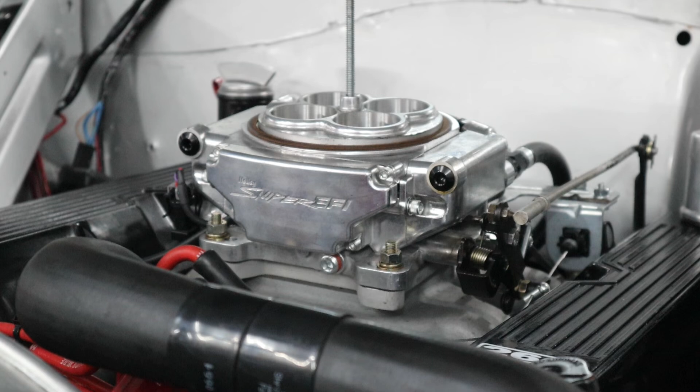Okay, so there's our Sniper unit, and there's a couple things that I want to give you guys some part numbers. So the part number 20-16 is the Sniper EFI throttle lever extension. That's what it looks like. It bolts on to the throttle linkage and gives you a better fulcrum for making the throttle easier to pull, especially when you have a cable system or anything like that.

And then if you look in the back corner, you'll see the TV cable bracket. That is a 1953 part number, and that's a throttle and kick down lever bracket. So you can buy those parts from Holley. It makes your installation a lot easier.

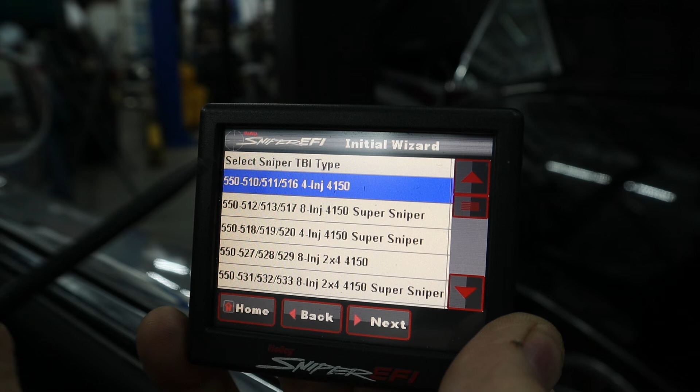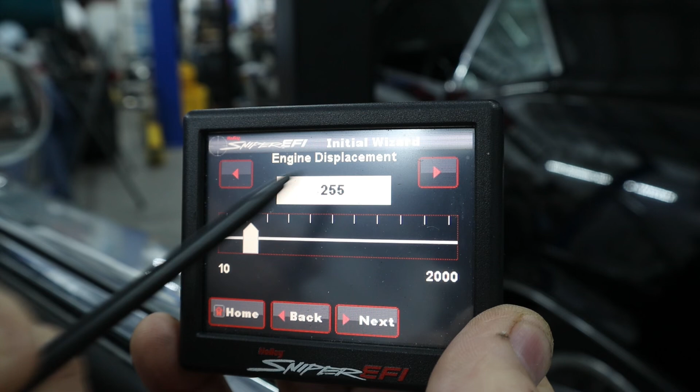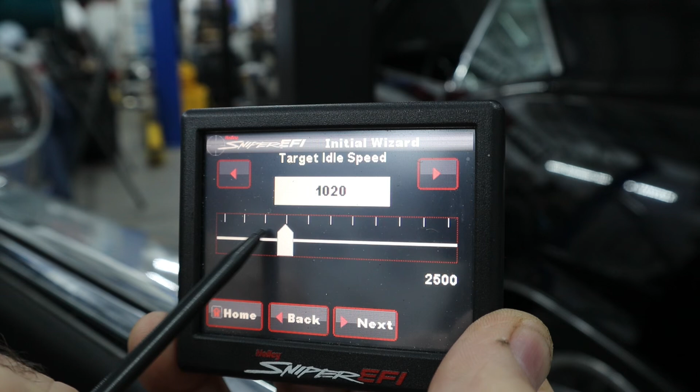Okay, so once you have the system installed, you get your 3.5-inch screen and you power up the key and it turns the system on. So from your home screen, you want to click Wizard, pick your system by your part number, number of cylinders, engine displacement. Now this motor is a 255. Your idle speed. The idle speed doesn't have to be perfect, just something in the ballpark.

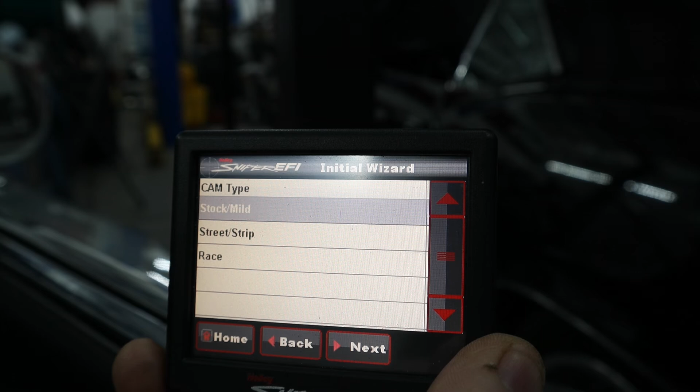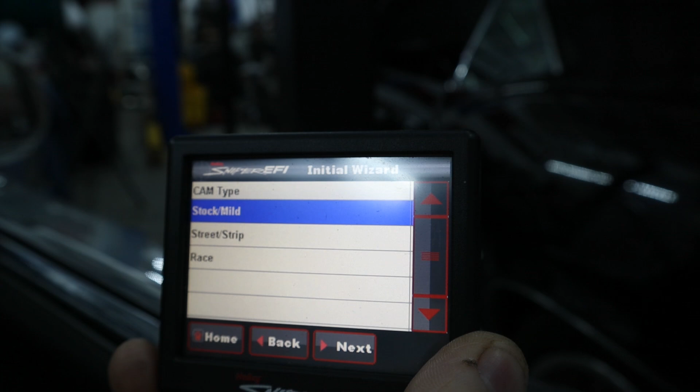Then you want to tell it what cam type. Now I have found that these tunes will overfuel the engine for initial startup, so I would definitely use stock or mild if it's a slight cammed engine. Street strip would be for something that is probably over 500 lift, and race obviously is for race. We're not going to have any power adders on this vehicle.

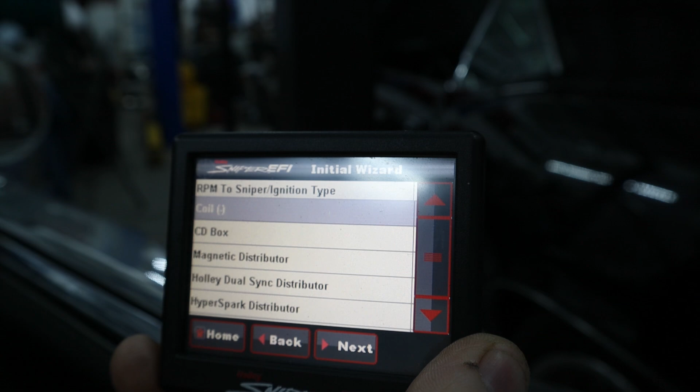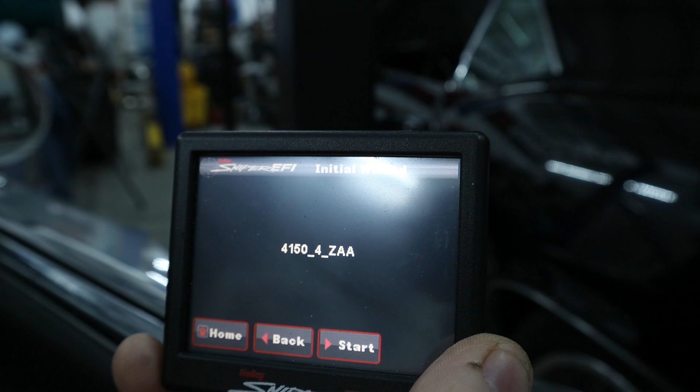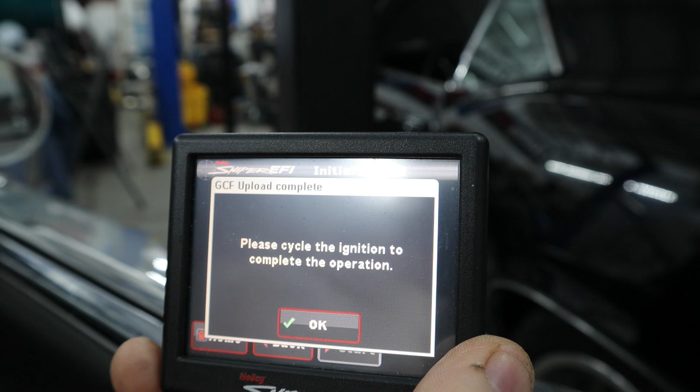And then you pick your ignition type. So in this vehicle we're using fuel only, so we use coil negative. But if you're using a CD box or a dual sync or a HyperSpark, you would select those. So now the handheld has picked a file, and we're going to send it to the ECU. You can hear the fuel pump turn on, turn off, and you have to cycle the key to make this permanent.

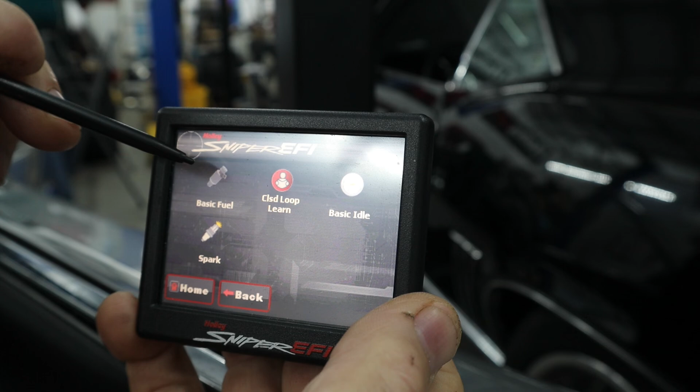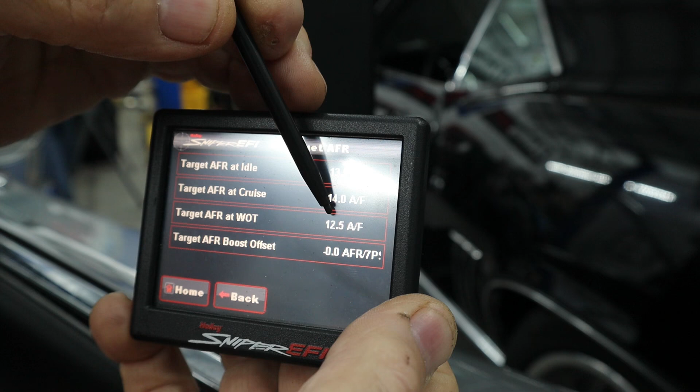Now the handheld reboots, and we're all set. Now you can hear the fuel pump turn off. Now you can go into your different pages for tuning. You got your basic fuel, target AFR. With the handheld, you get AFR at idle, AFR at cruise, AFR at WOT. You get power enrichment and fuel prime, basic things. You can go through and do all these different things. You can connect some outputs.

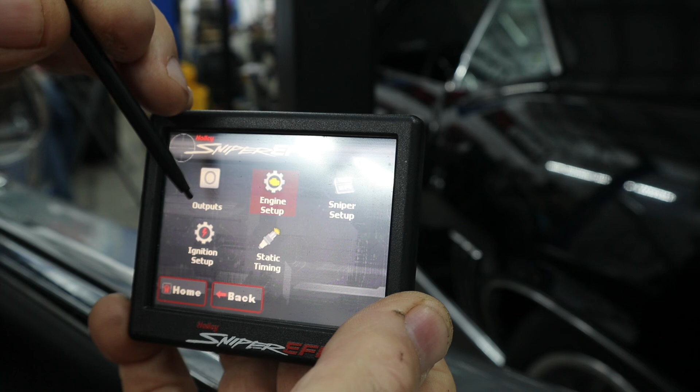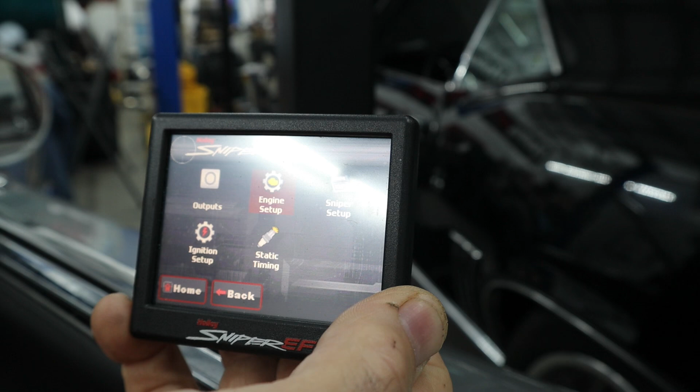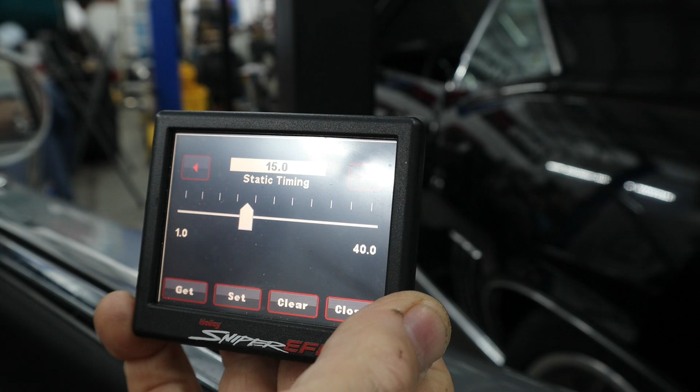So now that you have a base tune in there, what you want to do is start the engine. And if you're using any type of ignition timing control device, like a Holley dual sync, a crank trigger, or HyperSpark, you go to static timing, pick a number, make it an even number. So let's go 15. And then you put set, and now the ignition timing is locked at 15 degrees.

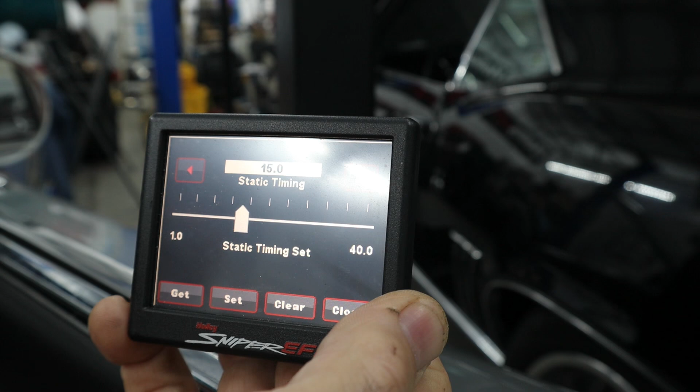You would put a timing light on the engine and adjust your distributor till the timing on the harmonic balancer matches the timing that you've selected for static. Once you're done, you click clear and you close it. Now whatever timing is on this map here will be the timing it's actually in the engine, 1 for 1. So you'll never have to move the distributor after that.

And then you have your monitors. You can go in here and you can see all your sensors: MAP, coolant, TPS, ignition timing, which is NA in this particular application, IAC position, battery voltage, manifold air temp. You can go to vitals. You can see when your fans are going to turn on and off, AC shut off, and whether it's in open loop or closed loop. These will turn green when they're active.

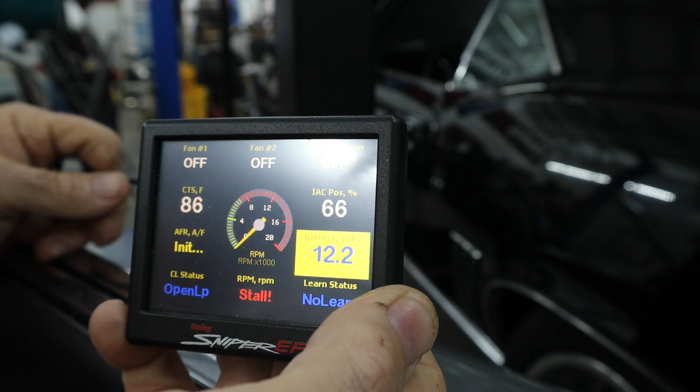Notice the RPM, it says stall. That means the ECU does not see an ignition input. When you crank the engine over, it should go to syncing, and then it'll start showing an RPM. That is the computer seeing a crank signal, identifying it, accepting it, and once it accepts it, it turns the injectors on and you'll receive an RPM and the vehicle will start and run.

Very important: if this box turns off while you're cranking the engine, that means the ignition power source that you have going to the ECU is not staying powered up during cranking. It could be a slight power drop, but it needs to maintain at least 10 volts to keep everything on.

So if this doesn't work, then you need to check your wiring. On old cars that didn't have an ignition signal while cranking, the signal would come from the starter. What I would do is I use a relay and I power it up through the ignition switch, and then I use a jumper from the start switch with a diode.

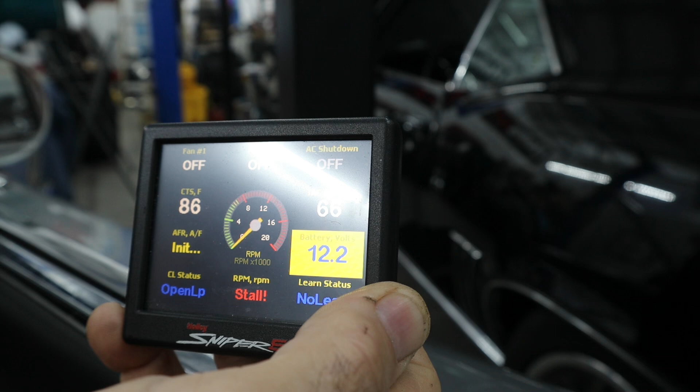So when it's in start, it's getting power from the start circuit of the ignition switch, and then when you let go of the key to ignition, the diode stops the voltage from going back and making the starter stay engaged. But that's a quick, easy way of doing it, and then the handheld will always stay on while you're cranking it, and the engine will run and start no problem.

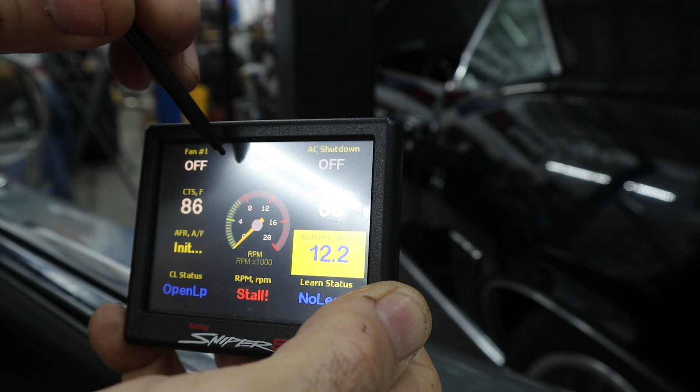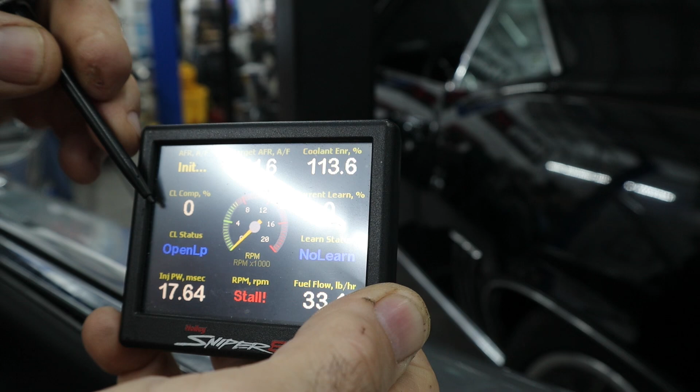And you got air-fuel ratio. Now this is going to show what the engine is actually seeing, or what the oxygen wideband sensor is seeing, and what the target is, and then you'll see the percentage of closed loop compensation and current learn. So closed loop compensation is an automatic adjustment from the ECU. It sees the actual, it sees the target, it does a calculation to figure out the percentage of change, and it makes a change. That is not a learned change, that is just an instant change.

Then the current learn is the same situation. It takes the information from the closed loop and says, okay, closed loop, when we're at this point, you're always adding 10% fuel. So then the current learn will add 10% so that the closed loop goes to 0. And it goes back and forth to the entire fuel map of the vehicle. So that's how the learning works.

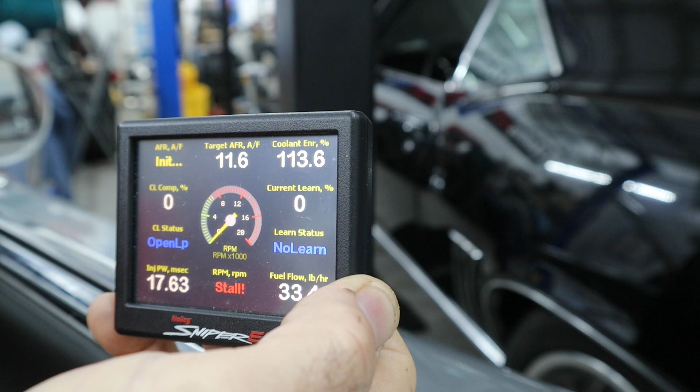And then if you have different other accessories, or if you want to do a dash layout, you can do your different dash layouts there. So that's all good. So now we've got a good running engine. Well, let me rephrase that. We have an engine that runs and seems to run pretty good, but it's not tuned. So you can do a couple things at this point.

One, I would go to File and go to Global Calibration Configurations, and there's the tune that the ECU wrote. So then what you want to do is drive the vehicle around, get it so that the closed loop and the learning turn green and are recording. Once that's done that for a little bit, you want to go back to this page and click Download from ECU.

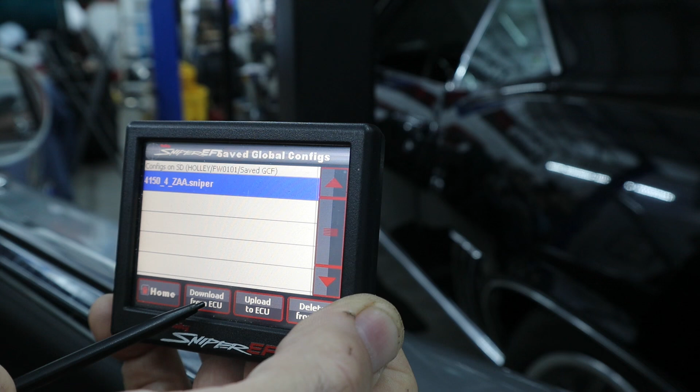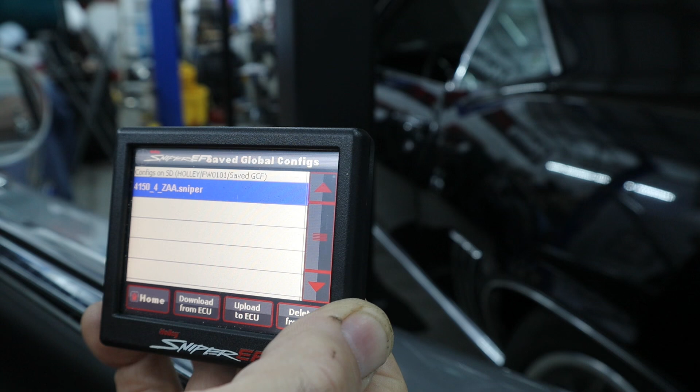And that's going to tell you what the current file is, and you're going to want to save and give it a new name, or just add the date to it, or some sort of way that you know which file that is. Then you can take that file out of the SD card and put it in your laptop or computer at home, your tower, and you can send it to friends or a tuner or whoever you want to send it to.

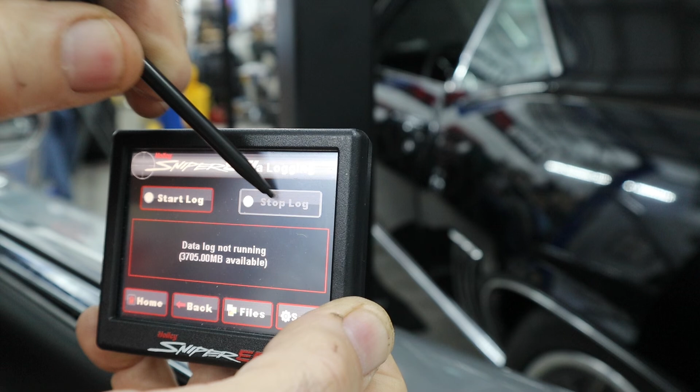The other thing you want to do is when the vehicle's running, you can click Logging. And then once you got the car up to operating temperature, click Start Logging and drive the car around, especially if it has a hiccup that you're trying to correct. Once you've recorded a session that you want, click Stop Log, and then you'll have that file saved. Then you can go to Files, and you'll have all the files that are saved and the size that they are. At that point, you can then send those files.

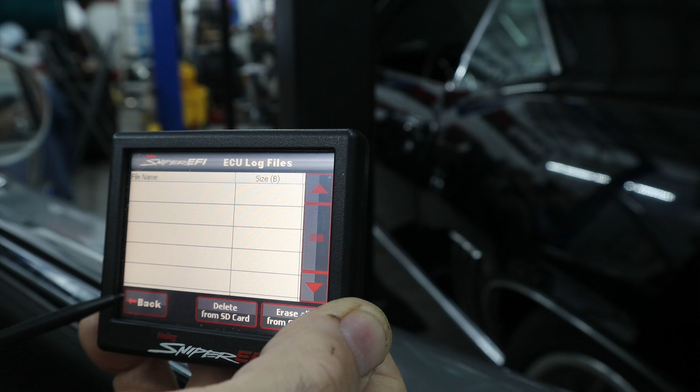So if you're going to have your vehicle remote tuned, what you need to send to the tuner is the current file that you've downloaded from the ECU, because the tuner wants to see the learn table. This file is the original file. There's no learn information in that file. So after you've driven it and you've made your data logs, then you want to click Download from ECU and give it a new name. That's the file that you want to send to your tuner.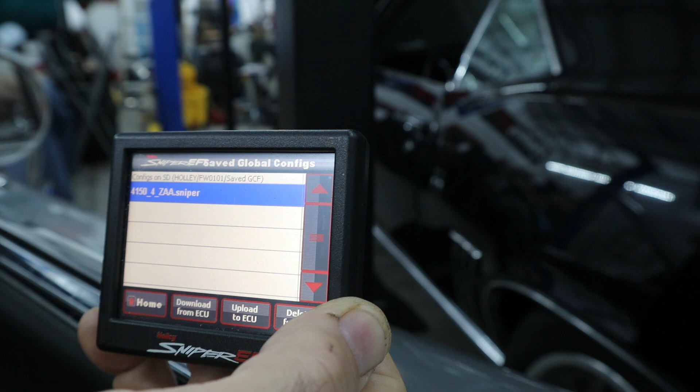So you send them that file, and you send them the data log, and then they can go through the data log and make corrections to the file and send you a new file. When you have the new file and you put it on your SD card, the name will be on here, and you would upload to ECU. So you're uploading the file from here and putting it in the ECU that's in the throttle body. So that's how that works. So let's go to the computer, and I'll show you some stuff on that.

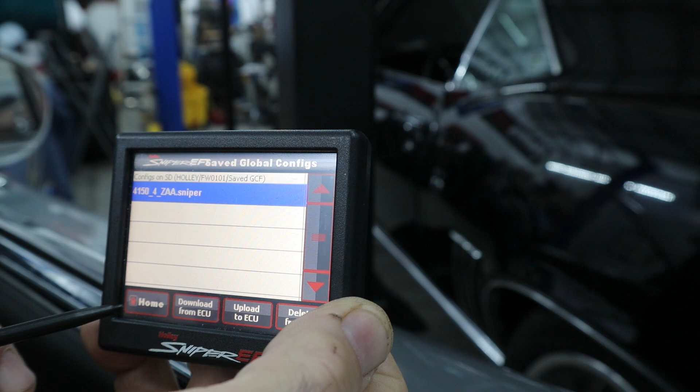Okay, so after you drive your Sniper fuel injection vehicle around for a little bit with the data log going, and after you finished the drive, you downloaded the ECU file to a new name, you can go to your desktop or laptop and make some adjustments in the software so that you don't have to be connected to the car. So first thing we want to do is we have to transfer the files from the SD card to our computer.

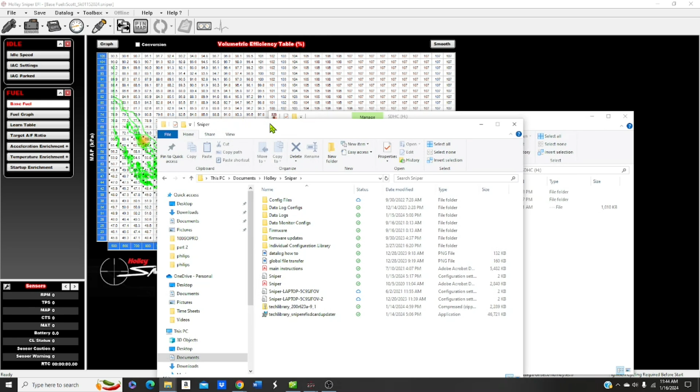So we go to our Windows, Documents, Holley, and Sniper, and got configuration files. So obviously I've got multiple files in here, so I have to go to a specific folder location. Now we're at Saved GCF, so let me backtrack a little bit here. So we're at Holley. This is the main page of the SD card.

Click on Holley, then FW0101, which is our newest firmware. Save GCF, and we select the new file that we saved, which is this one right here. We drag it over to our config files in our Sniper folder. Then we want to go back to Datalogs, and we have to open where we want that folder to land.

Back to our SD card, back all the way to the very beginning. Underneath Holley is Save Data Logs. We click there, and we have 2 logs saved. So what we're going to do here, as you can see, these already have the same name. So we can change these names by right-clicking and rename. And just do that for all of them. Oh, I deleted that one by mistake.

Okay, so now what you can do is go back to our SD card, click on one, hit Control, and then we can drag both. Okay, so now we can open this stuff in the software. We can minimize our pages here. So let's go ahead and open this up from scratch. So we'll go to our Holley Sniper software, and we want to open a config file. We're going to open the one that we just saved.

Okay, and the reason why we want to save after we run the car is because now our learn table will be populated. If you just pull a file out that's already there, the learn information isn't on that file. You have to re-save it, and I like to save it to a different name, and that way you have all the learning. So now we can see on this learning table how much fuel was either added or taken away from the tune. Okay, so now let's go to a data log.

Back a couple of pages here. Okay, data logs. And let's look at the latest data log. All right, so here's the last data log we made. You can see that it was almost 500 seconds in length. So let's go ahead and knock off some of these. So right now our red is RPM, as it's denoted here, and our green is TPS.

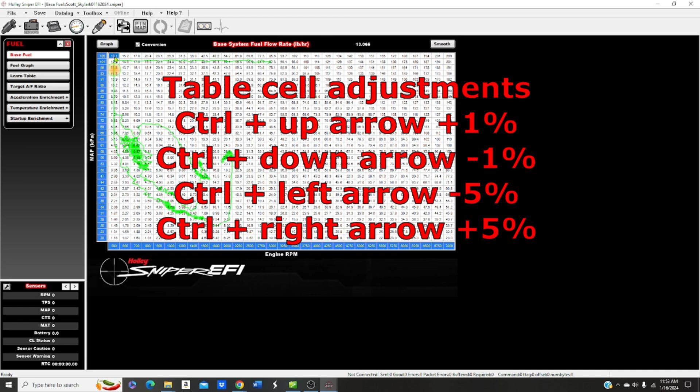So here, I think it was 19 there. So get our calculator. So we're at 19 divided by 13. So that's a 46% increase we need to do there. I probably wouldn't go that far, but at least now you know how much increase you need.

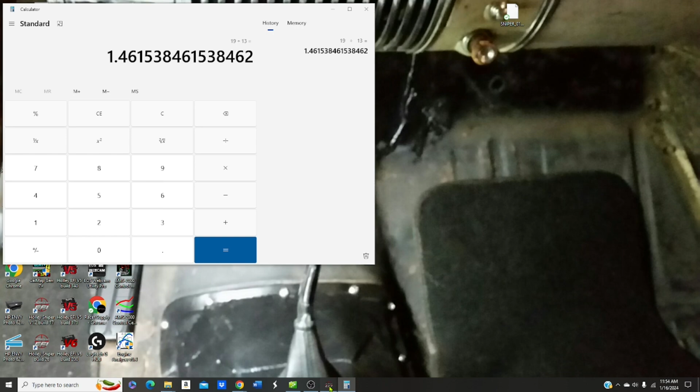So now we'll go to this cell and let's increase it 20. So we'll hit the control and right arrow to increase in 5% increments. So we're going to hit it 4 times. 1, 2, 3, 4. Now you see it made the change. So now what we'll do is highlight this way and right click on it, and we're going to fill the row values. So it's going to take those 3 numbers and equalize them. So we went 16.69, 17.8.

Okay, so now we're going to go down to here. So now it's going to go from 16 to 6.83, and it's going to interpolate all these. So again, right click, and we're going to fill column. Okay, so now we can go this way and we'll right click, and we're going to do fill row. Now we want to equal out all of these here. So we're going to fill row values.

And there it did. Now you can see on the screen, let me move the cursor. So now you can see there's little arrows, and that's telling you which way those cells were adjusted. So now we've added fuel to this section, so that should help in the stalling. So let's go back and read some more on the data log. All right, so we looked at this section. Let's look at the section where it actually stalled.

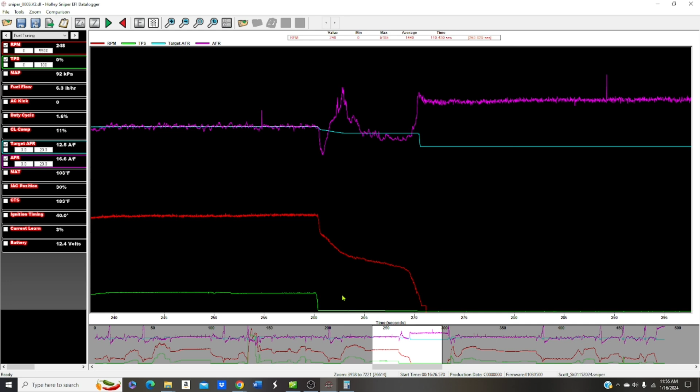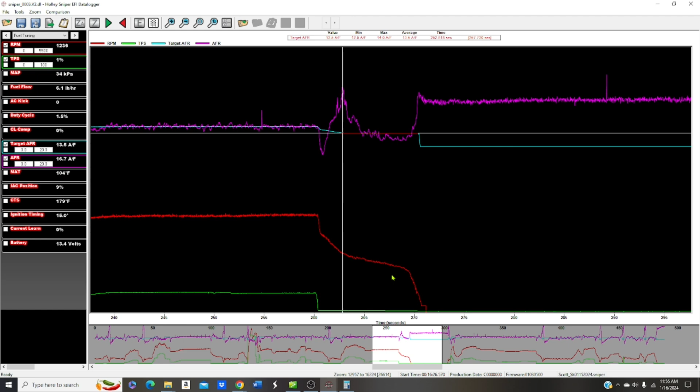Okay, so when we lifted out of the throttle, it got rich, and then it went lean. And then it tried to catch itself, but by then the engine was already on its way out. So let's see where that was on the fuel map. And that was down here. So what we're going to do now is let's look at the learn.

And see, these are all kind of positives, but on deceleration, you will not get too much fuel adjustment. Usually the open loop or the closed loop learn basically works when the engine is steady state or accelerating lightly. On decel, it normally shuts off, so this section will be harder to get tuned.

So what we're going to do now is go back to our fuel map, go back to our base fuel flow rates, and we're going to take this section and increase it by, let's increase it by 10%. Okay, and you can see now those numbers have all gone up.

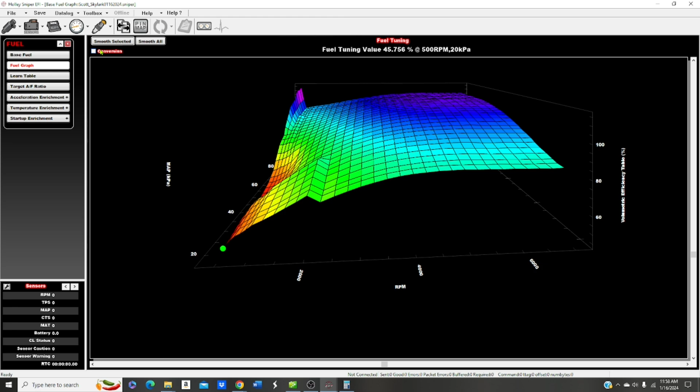Now we want to smooth out the graph, so we're going to go across here and fill row values, and now we're going to go this way, do the same thing. We're going to do column this time. We want to go up and down, and that way it just smooths it all out. So we go to our fuel graph, base fuel consumption. You can see that it's very smooth.

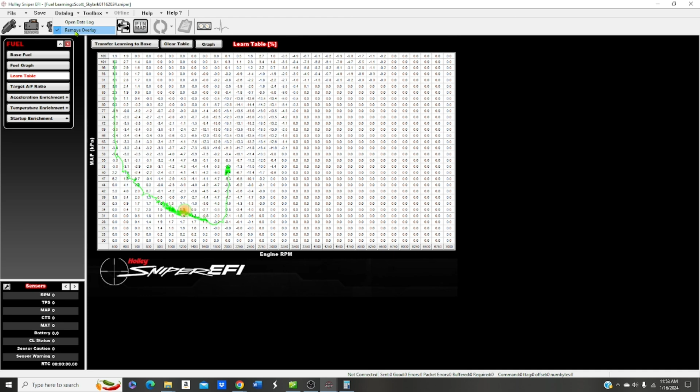All right, so we can go back here. Everything's pretty good. Let's go back to our learn. Now that we've made these adjustments, we can transfer the learn, because we have a pretty good, let me turn off this overlay. So whenever you want the data log to show in your tune, that is overlay. So we can remove the overlay, and now we're back to different colors on the graph.

So we'll go back to our learn, and what we're going to do is transfer the learn to base.

Okay. And now you can see on these graphs, if I put the colors on there, it's hard to see. Now it's all white again. You can see there all the places where it made adjustments. So that's all done now. So now we've fixed our fuel curve for that data log.

Now there's some other things that you want to do to your tune in the tower or in the software that you can't do on a handheld. So let's go to target AFR, and here's our target AFR, and it is 13.5 here, 12.5 up there, 14.0. It's a simple graph, and it's on the rich side. So to make it run cleaner, get better fuel mileage, we're going to go to 2D table.

Now we're going to change this section. We're going to make that 14.0 and hit enter. Then we're going to take this section, this is our cruise section, and we're going to type in 14.7. And we're going to go this way, right click, and fill row values.

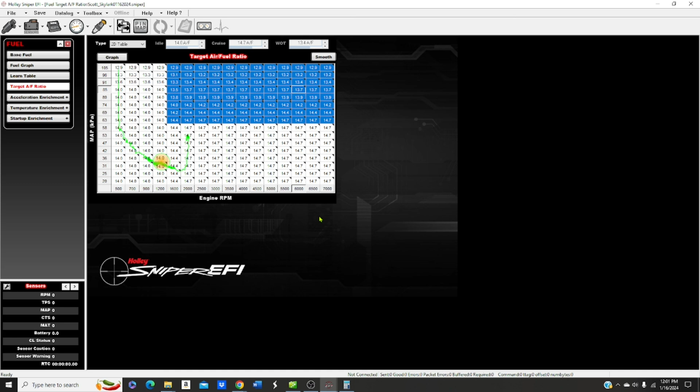Now 12.5 is pretty rich, especially for a stock engine, so we can take that to 12.9. Okay, and then what we do is we can come down here, right click, and we'll fill column values. I'm going to do the same thing here. We're going to go down to here, and now let me put it in the color.

So now you can see we're in the cruising range, 2,000 over. We're going to target 14.7 because we're at light load, barely any throttle, so we can lean it out there and get some fuel economy out of the vehicle. And as we get on the throttle to go to wide open throttle, you can see the numbers get richer as we go.

They don't need to be all rich. At 3/4 throttle and you're in this area, you don't need to be 12.9. That's just throwing fuel out the tailpipe. So we can be 13.7 and 13.4. That's fine. So that's one thing you can do here. Now, of course, you can change this table any way you want.

If you're looking for maximum fuel economy, what you'd probably want to do is data log and see where you are in your cruising range. Find those cells in this area. You could take them out to 15.0 if you want. You have to watch for detonation, but you can because it's very, very light load there.

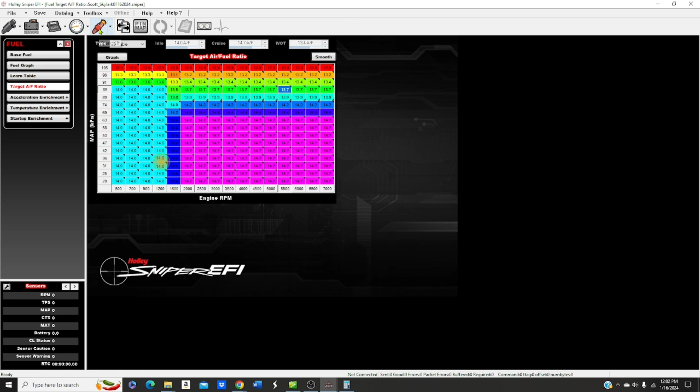So now this car is fuel only, but if we did have timing controlled also, again, the handheld only makes a simple file. So 15 at idle, 36 at cruise, 32 at wide open throttle. So you can change that by clicking your table there, and then you can manipulate these any way you want.

Typically, if it were a timing controlled car, I would put 22 degrees there. 32 up there is fine. So I would interpolate these, fill column values. That's all pretty good there. So I would then go from here down to about here. Do the same, interpolate by fill column values. And that way now you've got some curvature in the tune.

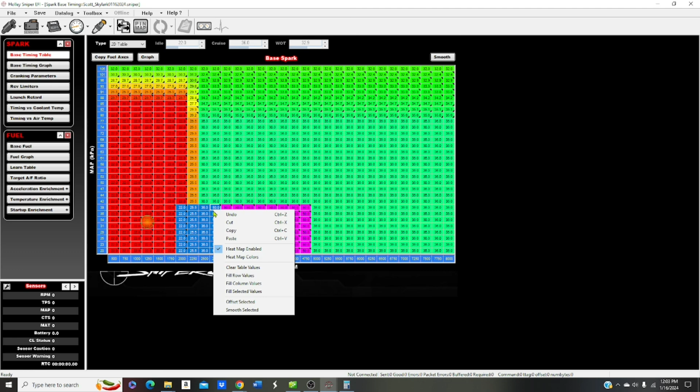And then again, if you were trying to get maximum fuel economy, I would probably come in here and do something like this. Put that at 50 degrees and interpolate. That's going to be fill row. Interpolate. It's going to be fill row. And I would do column. And now you'd have a pretty good timing curve there.

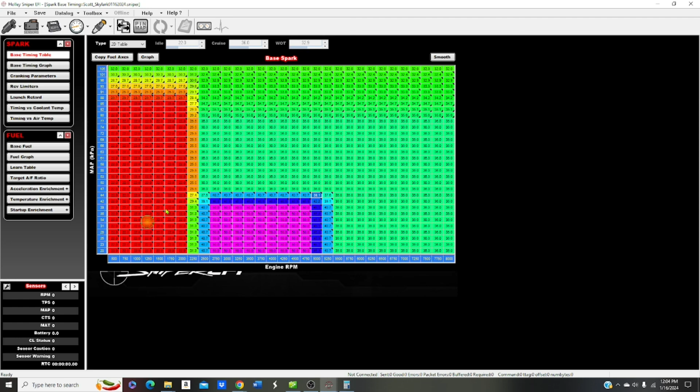And you can see that these numbers are all basically climbing as the load gets lighter. And then in your highway cruising area, we got the timing out to about 50 degrees. Of course, these are just raw numbers. This may not work on your application, but I'm just trying to give you the idea of how you can control this stuff.

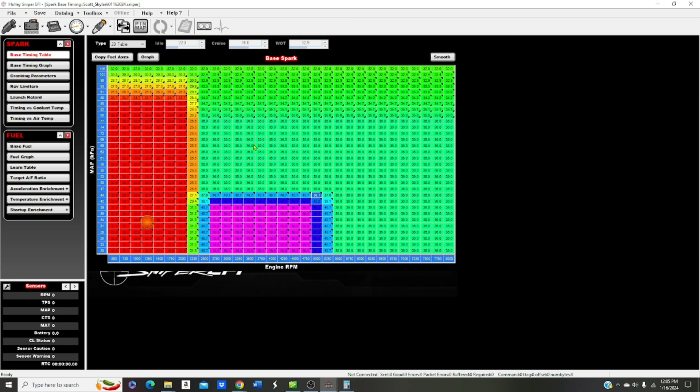If you think about an old school car with a vacuum advance, this is your mechanical advance up here, and this is your vacuum advance. Very light load, vacuum signal gets pulled up, and it advances the timing. That's how they get fuel economy that way. And as soon as you tip in the throttle, the vacuum goes away and it gets back into the mechanical timing. Same thing with your fuel.

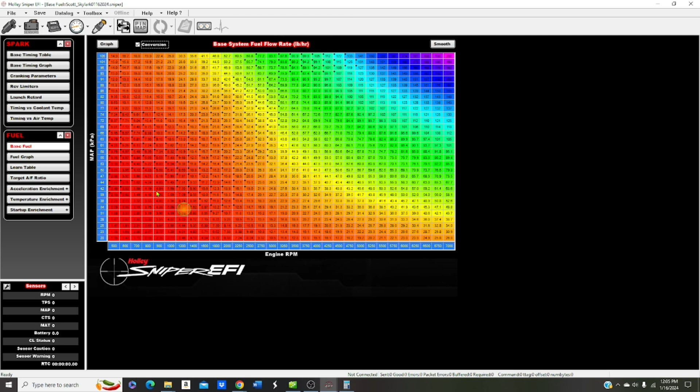When you're in fuel, this section here is your idling. This section up here is your wide open throttle. This is deceleration. And if you're tipping in and stuff like that, it's going to go through here. So those are just the different things you can do when you're on a laptop or on a PC desktop that you can't do with the handheld.

So you can make these adjustments, right? Go up here, we save it. Now we're going to save it to a different name again because we've made adjustments. We don't want to save it to the same name. So since I already put that one as today's date, I'm going to do _01. So that means it's the next tune after the previous one.

Then what we'll do is pull up our documents file where all of our software is being stored. Go to Sniper, configuration files, find the file you're working with. Obviously, if you only have one car, you're only going to have one folder in that system. Then we want to pull up our SD card. Go back to the card.

Because we want to transfer the global file, we want to click on Holley, the firmware that we're running, save GCF. And then we just simply take this folder, drag it over there, boom, it's done. Now we're ready to go back to the car and upload the file to the ECU. And then we will data log and do it again.

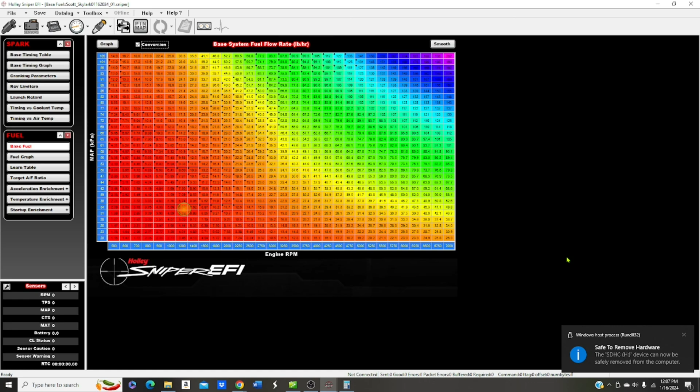Once you have this learning table to where it's plus or minus 5, you're pretty much done, because barometric pressures, weather conditions and stuff like that are always going to affect that to a point. And when it's plus or minus 5, it's only 5% adjustment, so it's 10 total. But that's more than enough to do what you need to do.

One other thing that I didn't do that I should is you click on the ECU icon and you go to closed loop learn. Now on this table I've already done it some, but once you've got the tune in there and you've made adjustments, and as you saw, we were at 15% in the learning. So what you could do is highlight this whole thing, go to 20. Now that's giving you 20 plus and 20 minus fuel control. So it's still 40% overall fuel control. And same thing with your learning. Drop that down to 20.

Now the reason you want to do this is when you first put the SD card in your computer and you open these pages up, they're going to be at 100% or 150%, according to whatever tune's in there. So you have to think, if your O2 sensor went bad, your closed loop is 100% and your learn is 100%, that's 200%.

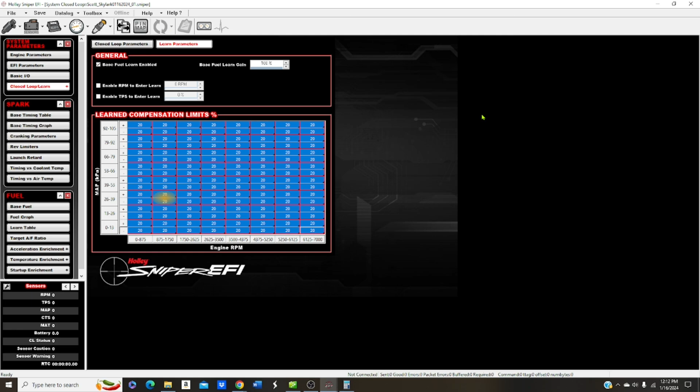All right, well, I hope you found this video informative. We're going to start doing these in modules, taking each section of the tuning one bit at a time. That way it's easy to reference when you're doing your own vehicle.